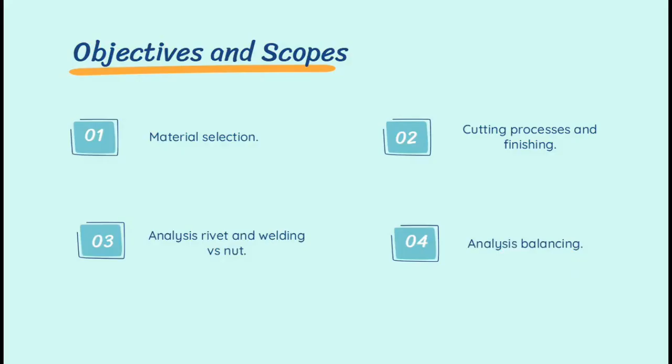The objective of material selection is to identify the material that is best suited to our project design requirements. The scope is to provide general principles, engineering guidance, and requirements for material selection. The limitation is the cost of material must not exceed the approximate cost of 500 ringgit Malaysia.

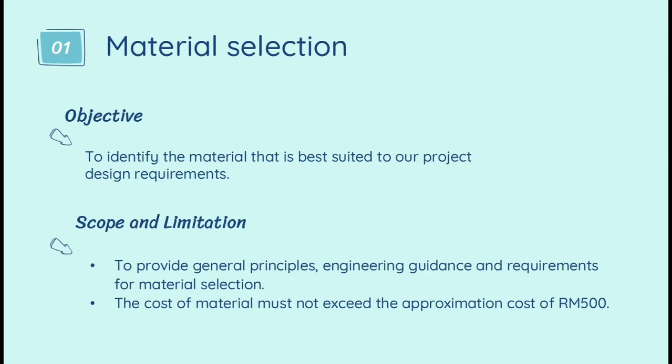The objective is to ensure the box is cut in precise measurement and has a finishing that is safe and has good appearance. Scope and limitation: cutting metal with hand grinding is dangerous because of sparks. Shearing machine cuts the metal to make the box compartment.

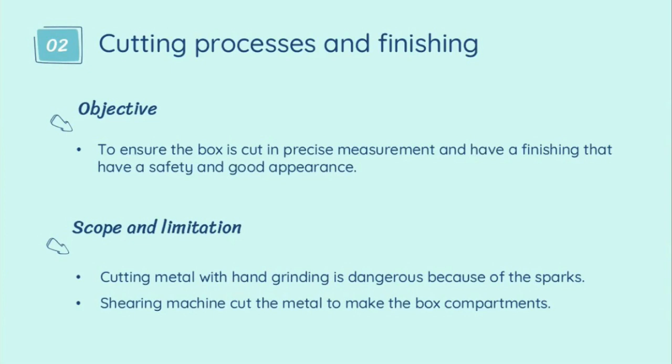The objective is to determine which method is most suitable and easier to use to attach the parts of the ladder carrier. The scope and limitation: all methods used in the fabrication of the ladder carrier are welding, rivet, and screw and nut, where different parts of the material use different methods to attach based on suitability.

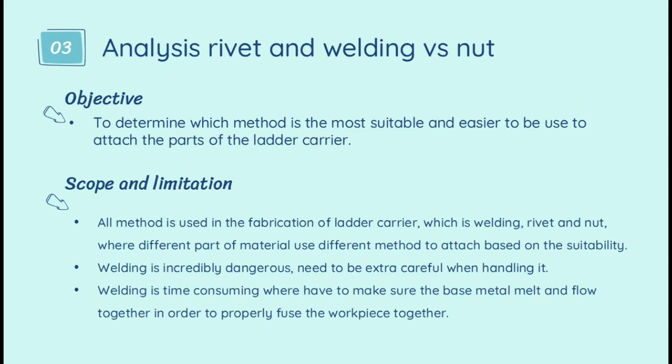Welding is incredibly dangerous. You need to be extra careful when handling it. Welding is time consuming, where we have to make sure the base metal melts and flows together in order to properly fuse the workpiece together.

The objective of balancing is to prove that this ladder carrier is completely stable and safe for use, or find any defects that could potentially be unsafe for users. For the scope and limitation, each box compartment can fill up to 6 to 10 books based on the average standard book size and dimension.

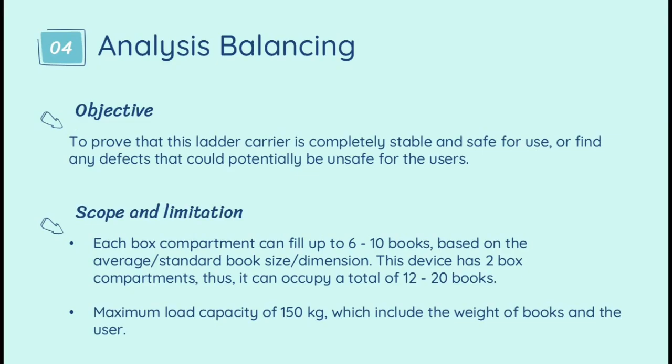This device has 2 box compartments, thus it can occupy a total of 12 to 20 books. For the load capacity, it can withstand up to a maximum of 150 kg, which includes the weight of the books and the user. The problem statement for our project is that we found librarians have difficulty arranging books at high bookshelves.

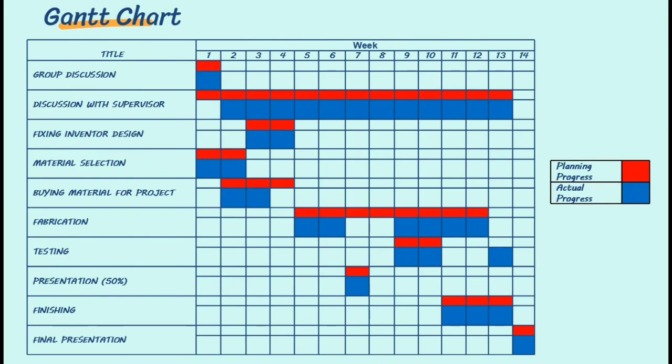Lastly, we chose a 360 degree wheel trolley because 360 degree movement is free, instead of 180 degree which only moves left to right.

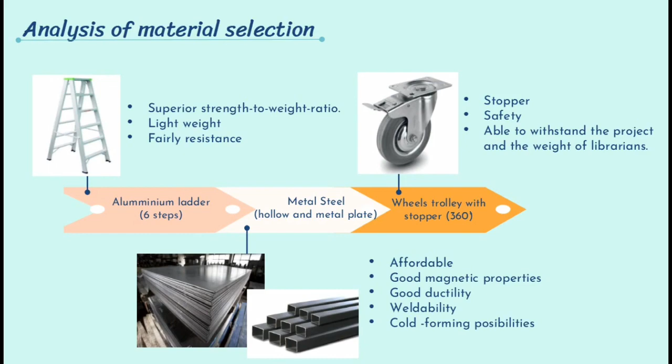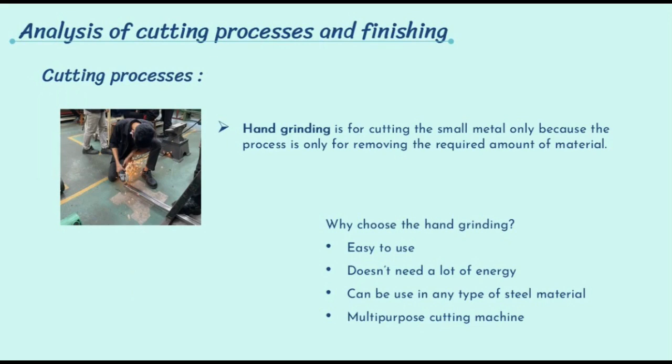The analysis of the cutting process: first, hand grinding. Hand grinding is for cutting small metal only, because the process is only for removing the required amount of material. Next is the shearing machine, which is for bigger metal sheets. We use the shearing machine, which does the cutting, but it only cuts metal sheets.

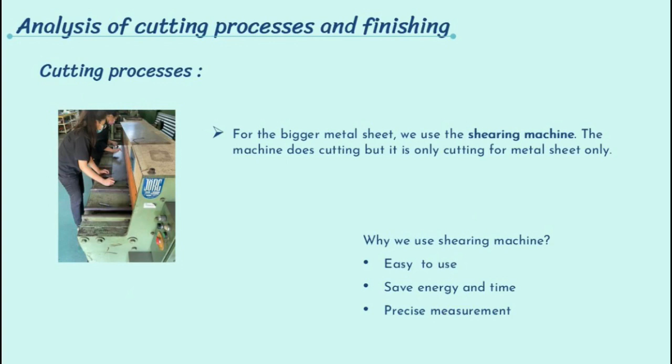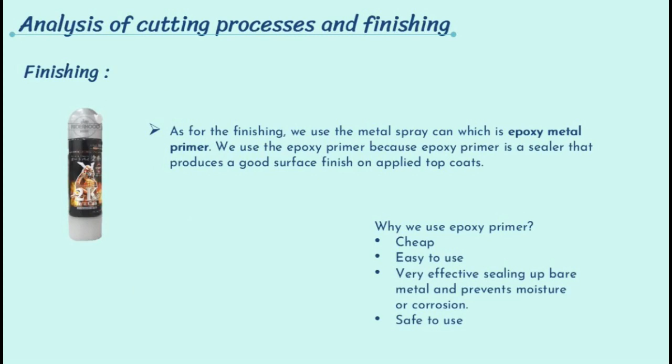As for the finishing, we use the metal spray can, which is epoxy metal primer. We use the epoxy primer because it is a sealer that produces a good surface finish on applied top coats.

Next, user safety is always the top priority of our project. So by using edge protectors at the sharp edges of the box compartment of the ladder carrier, it helps to prevent the risk of getting injured.

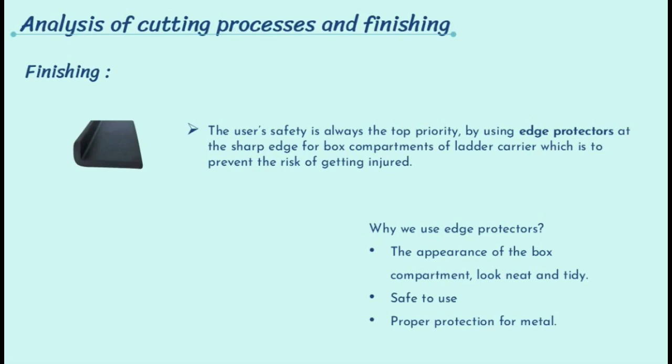I'm going to explain the analysis of rivet and welding versus nut for our project. For welding, it usually has superior strength of joint and is permanent. That is the advantage of welding joints, but the disadvantage is that it causes distortion of components. This means uneven heating and cooling is also associated with distortion of jointed structures, which causes dimensional inaccuracy and thus rejected parts.

For this method of joint, we use it on the top of the ladder for the holder, which has to be connected to a metal sheet on the top surface of the ladder.

We use it for the holder because it is important for the safety of the user. Then there are the screw and nuts. We use this method on the wheels. This method is easy to install and also uninstall, but it has the disadvantage of corrosion, or commonly known as rust.

We use it for the wheels because when the corrosion happens, we can easily replace it. So rivets are highly durable. They are resistant to corrosion, moisture, and even chemicals.

Most of the rivets used in steel construction are made out of highly resistant metals and alloys such as galvanized steel, nickel, titanium, and aluminum-based alloy, which increases the tolerance to high pressure and shear load. The anti-corrosive properties also increase the life of the part being joined together.

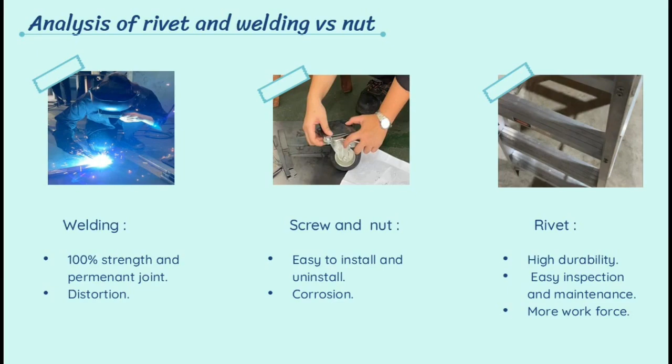Also, it is easy to inspect and for maintenance purposes. But it will need a lot of work first because we need to install it on most part of the ladder. And yeah, we did this riveting method mostly for the ladder.

I'll be presenting on the analysis balancing of ladder carrier. We use double-sided ladder for this project. It is heavy duty with maximum load capacity of 150 kg. The material of this double-sided ladder is lightweight aluminum construction.

For this ladder carrier, we'll be focusing on the stability of this ladder carrier in order to achieve its balancing. It has a durable body to support heavy duty jobs. It also has a flat bar, which gives more stability to the ladder when climbing on it.

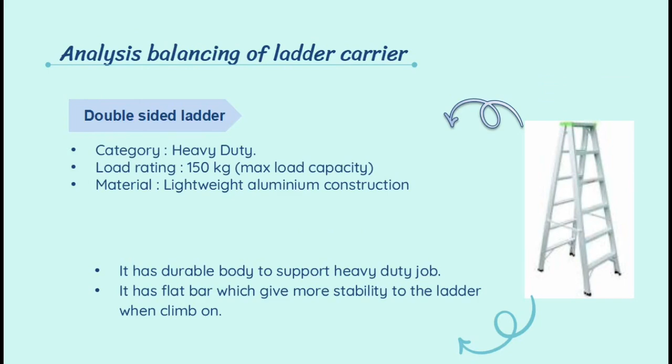In this section, I managed to analyze the balancing of ladder carrier based on the books occupied in the box compartment. But before that, I will show you the average standard book size and dimension. The standard book size is 6 inches wide and 9 inches tall, which is equivalent to 152 mm for the width.

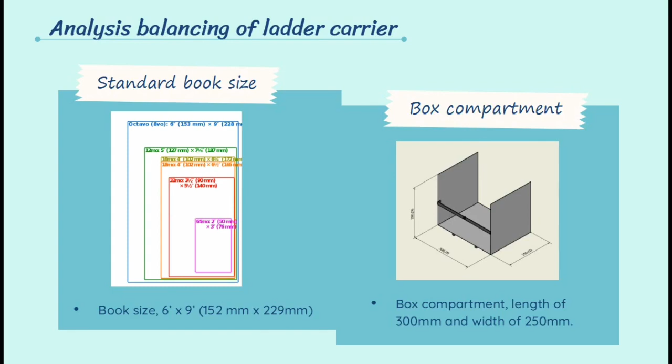and for the length is 229 mm. The size and dimension of the box compartment for the length is 300 mm and for the width is 250 mm. Therefore, the books definitely can fit into the box compartment. Testing on the balancing of ladder carrier with books.

It started with minimum amount of books, where for testing A, 6 books is placed into only the left side of the box compartment. From the observation for testing A, the ladder carrier is stable even though the right side of the box compartment is empty and no user on the ladder.

Testing A is repeated for testing B, but at the different side of box compartment where it is on the right side. The observation is the same as testing A. For testing C, both sides of the compartment are filled up with a total of 12 books, where each box is filled up with 6 books.

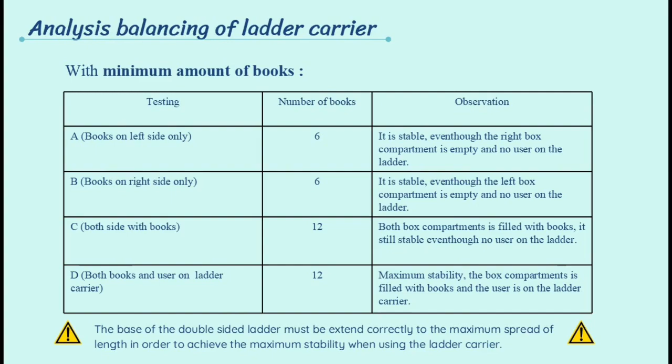For the observation of testing C, it is stable even though no user on the ladder. Lastly, for testing D, the box compartment is filled with a total of 12 books and the user is on the ladder. Next, move on to the testing on the balancing of ladder carrier with maximum amount of books, where for testing A, 10 books is placed into only the left side of the box compartment.

This is because the ladder carrier gained its stability from the base itself. The base of the double-sided ladder must be extended correctly to the maximum spread of length in order to achieve the maximum stability when using the ladder carrier. In short, the wider the base, the more stable the structure.